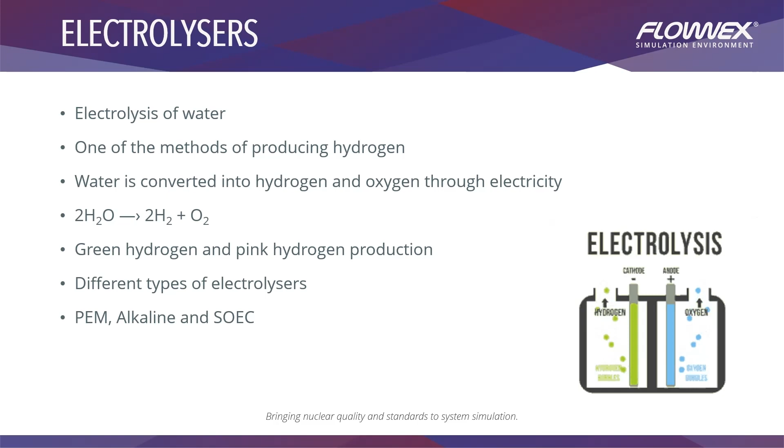From the table, you can see that the operating temperatures for the PEM are the lowest. The alkaline electrolyzer has a bit higher range, and the solid oxide electrolyzer has a very high operating temperature. The operating pressures for the PEM and alkaline electrolyzers are up to 30 bar, whereas the operating pressure for a solid oxide electrolyzer is up to 10 bar.

The PEM uses a polymer electrolyte membrane, the alkaline uses a potassium hydroxide electrolyte, and the solid oxide electrolyzer uses a solid ceramic material for an electrolyte. There is a lot of scientific material describing electrolysis and the different types of electrolyzers, if you'd like to read up on it after the webinar.

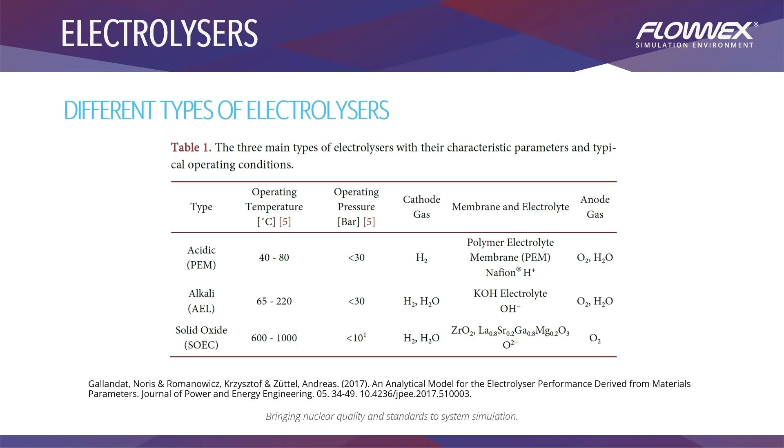Alkaline electrolyzers have come a long way and are currently the most commercially used to produce hydrogen. We will use a simple alkaline electrolyzer to investigate a system's power consumption and controllability. To do that, we need to build an alkaline electrolysis system in Flownex which can help us analyze the parameters.

A circulation pump is used to circulate the solution through the electrolyzer and separators. Hydrogen gas and oxygen gas are produced in the electrolyzer, are separated in each of the respective separators, and tapped off for process-related use. Cooling water is also used to cool down the produced gases. A lye cooler situated between the hydrogen separator and the circulation pump is used to cool down the solution to ensure that the alkaline electrolyzer is operated at the safe temperature.

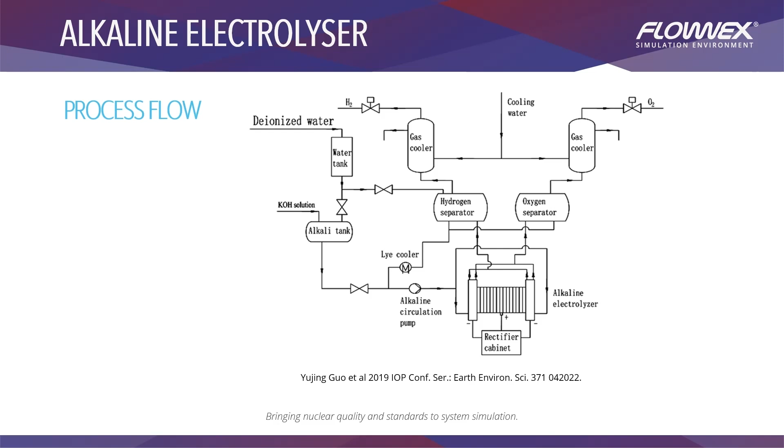We can now identify what is required to simulate an alkaline electrolysis plant. We need to model a mixture of potassium hydroxide and water for the alkaline solution that is circulated through the system. We need a gas and fluid mixture model to track the flows and thermodynamic properties of the gases produced in the alkaline solution. We need a way to describe the electrolysis reaction in the electrolyzer stack.

Critical parameters that need to be calculated are the amount of energy required for the reaction process, the amount of reactants required, the amount of products that will be formed, and the amount of heat that will be generated.

The amount of work required to pump the alkaline solution through the system and to pump the cooling water to be used to cool down the produced gases needs to be determined as well. We need control models to investigate start-up and operational conditions.

Focus areas will be regulating the potassium hydroxide concentration of the alkaline solution to enhance the electrolysis process. Water will be consumed and converted into hydrogen and oxygen, which will influence the concentration of the solution. The cooling of the alkaline solution and produced gases needs to be investigated as well.

The temperature of the alkaline solution must be regulated due to heat generated from the electrolysis process to ensure safe operation. The amount of heat required to cool down the produced gases to aid in storage must be calculated as well. We need pressure drop models to model flow and flow control such as piping and valves.

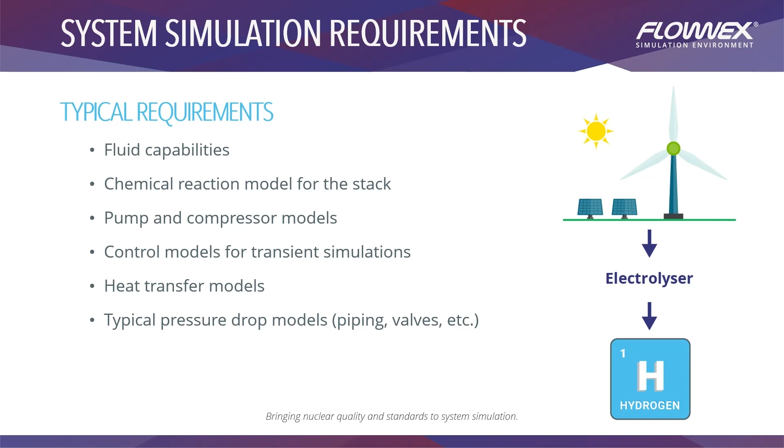How does Flownex fit in with the solution? And is Flownex capable of modeling the system that has been described? Let me take a moment to discuss Flownex and its capabilities. Flownex is an engineering tool that can be used by engineers in the design and analysis process of thermal fluid systems. It solves the fundamental physics for flow and heat transfer components of large thermal fluid systems.

Flownex uses a one-dimensional approach in solving systems. Flownex does this by solving the conservation equations of mass, momentum and energy on component level. All components can be solved fundamentally in true steady state as well as transient with either fixed or adaptive time steps. Flownex houses a large library of standard components used in industry, advanced fluid models, control library and integration with third-party software such as ANSYS, MATLAB and Excel.

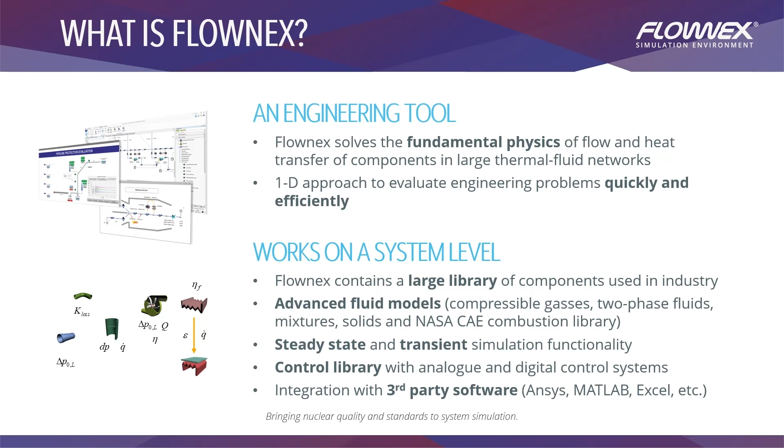Ensuring the best standards of quality compliance, Flownex is developed within an NQA-1 and ISO 9001 environment. Flownex also has a user-friendly interface with a help manual that can be quickly accessed and contains detailed explanations of each component and provides guidance on how to specify inputs and interpret results from the simulation.

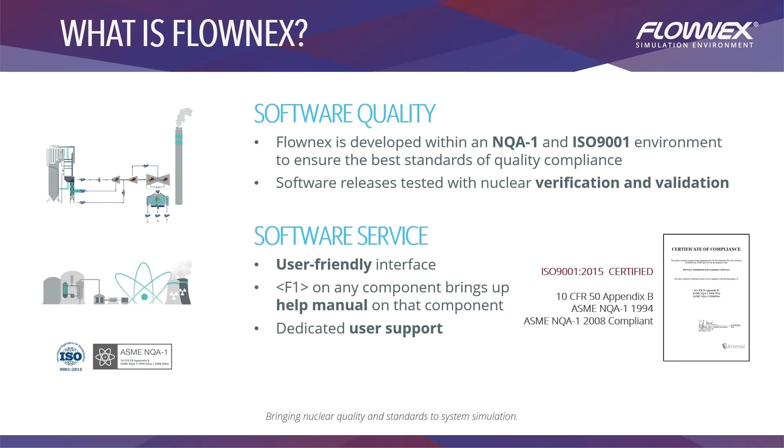Having a look at the typical requirements of modeling an alkaline electrolyzer and what Flownex can offer. Flownex has a vast library consisting of liquids, gases, two-phase fluids, and the added capability of creating gas mixtures or liquid and gas mixtures. The NIST importer can be used to import custom fluids created in NIST or to expand the temperature and pressure ranges of existing fluids in Flownex.

The chemical reaction in the electrolyzer stack can be modeled by using a built-in chemical component. Custom reactions can be implemented in Flownex using scripting with C# based programs, IronPython and Python. Flownex can be integrated with external programs such as Cantera or MATLAB to describe the stack. The electrolyzer stack can also be implemented in Flownex as a reduced order model or by co-simulation using the FMI capability of Flownex.

Flownex provides the user with simplified pump and compressor models to design these components for different flow rates and pressures. Complex models are included where you can add the pump charts or compressor maps obtained from suppliers. Flownex has a built-in control library with analog and digital controllers to aid the user in investigating controller performance and stability.

A library of common heat exchanger models is included in Flownex, such as shell and tube, finned tube, plate heat exchangers, etc. Flownex also allows the user to add custom heat transfer correlations. Flownex has a vast library of typical pressure drop models such as pipes, valves, etc. These include simple to complex models depending on availability of specific input data.

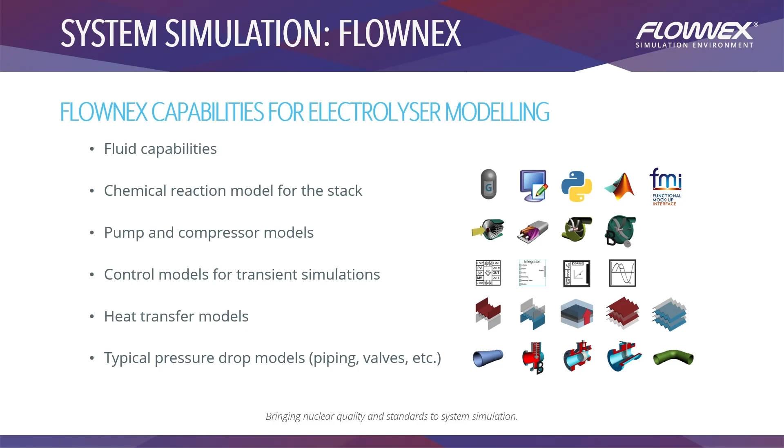Let's go over to Flownex to look at a simple alkaline electrolyzer model I've built and see how we can use Flownex's functionalities to analyze the power consumption and controllability of the system. Here is the alkaline electrolyzer model I've built in Flownex. The different components are the makeup water supply tank, the valve that controls the supply of water to the system, the potassium hydroxide supply tank, the valve that controls the supply of potassium hydroxide to the system.

We have our circulating pump, we have our lye cooler, we have our separators, we have our electrolyzer, we have our hydrogen product stream, our produced oxygen product stream, and also the cooling thereof with finned tube heat exchangers. We also have a PID controller that controls the supply of water to the system.

I've created two graphs that track the overall power consumption and the conditions of the electrolyzer parameters within the system. These parameters are the temperature and concentration in the electrolyzer. The overall power consumption is calculated by adding the power consumption of the circulating pump, the solution cooler, the electrolyzer, and the cooling pumps.

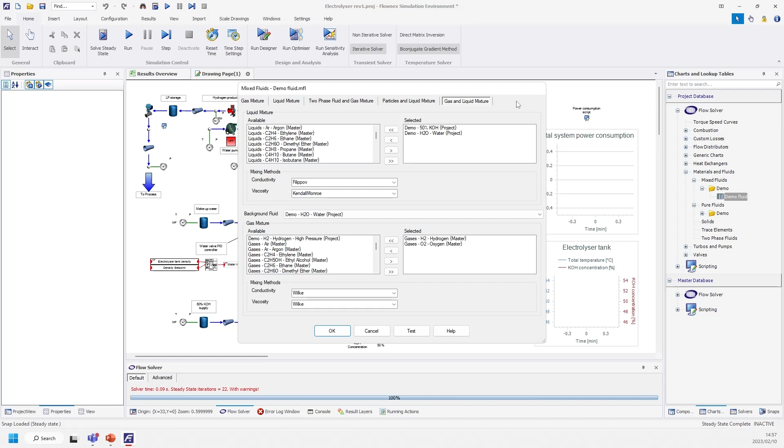I made use of the gas and liquid mixture functionality to create a mixture between the 50% concentrated potassium hydroxide, water, hydrogen, and oxygen.

A transient simulation to model the startup of the electrolyzer was set up in Flownex with actions. Firstly, the potassium hydroxide solution will be circulated through the system. The water valve will open and the potassium hydroxide valve will close as soon as a set level has been obtained in the separators. The water valve will remain open until the desired concentration of potassium hydroxide has been achieved in the electrolyzer. When the system has stabilized, the electrolyzer will switch on and the cooling pumps will switch on shortly thereafter to cool down the produced gases.

The alkaline solution cooler will switch on as soon as the solution temperature goes too high. This is to ensure that the electrolyzer is operated at safe temperatures. So let's run the transient and see how the system responds during startup. Firstly, I'm going to load my snap, solve steady state and run transient.

While the transient simulation is running, we can keep track of the system power consumption and see how the power increases as different parts of the electrolysis plant are switched on. As you can see, the power increased with the alkaline pump switching on. I've also added some indicators to show whether the components are on or off, with green being on and red for the off components.

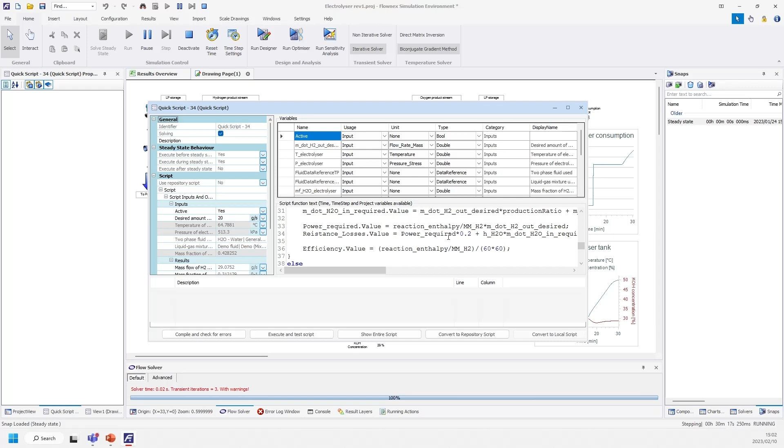As mentioned before, we used the script functionality of Flownex to describe the electrolyzer stack. The chemical equations are written as simple C# code and can be easily changed for the different types of electrolyzers and operation. The electrolyzer stack can also be described by coupling Flownex with external programs such as MATLAB or ANSYS.

As you can see, we are now at a real-time simulation time of 30 minutes, and we can see that the system is starting to stabilize in terms of power consumption as well as the temperature within the electrolyzer tank. We can also note that the solution cooler has switched on to maintain the safe operating temperature within the electrolyzer at about 70 degrees Celsius. And the overall power consumption is currently at 6.3 kilowatts.

At any point during this simulation, if you want to track any other parameters within the system, you can just click on the components and view the results at that point. You can have a look at the low pressure storage as well as our fin and tube heat exchangers, and that is our startup transient simulation of an alkaline electrolyzer in Flownex.

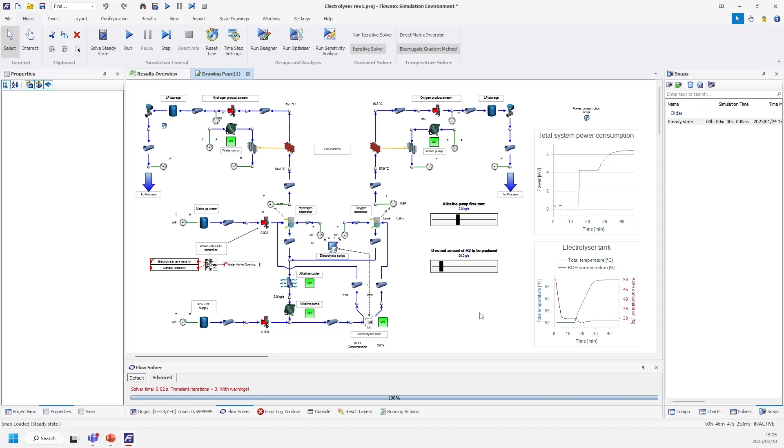Such models can be used to test additional scenarios such as unwanted valve closures, pump trips, electrolyzer trips, compressor trips, inadequate power supply, to see how the rest of the system will respond. That is the end of the demonstration in Flownex. I would like to take time and summarize the webinar.

Flownex is a tool that engineers can use to design, analyze, optimize, and evaluate complex thermal fluid systems. This includes thermal management, power consumption analysis, failure mode studies, control stability investigation, feasibility studies, performance and efficiency studies, etc. Where power consumption and control stability are important parameters to investigate during the design phase of electrolysis plants, Flownex provides a way of tracking these during real-time simulations.

Flownex can model complex fluids and mixtures with the ability to import custom fluids. Custom components can be created in Flownex to model the electrolyzer stack, or Flownex can be coupled with external programs. Flownex has a large library that ranges from basic to complex models: various pressure drop models such as pipes, valves, etc., heat transfer models with common heat exchangers, a control library with analog and digital controllers, and turbomachinery components to model pumps and compressors. With engineers worldwide striving for a better and greener future, using system simulation software such as Flownex can help to fast-track the design process, saving time and money.